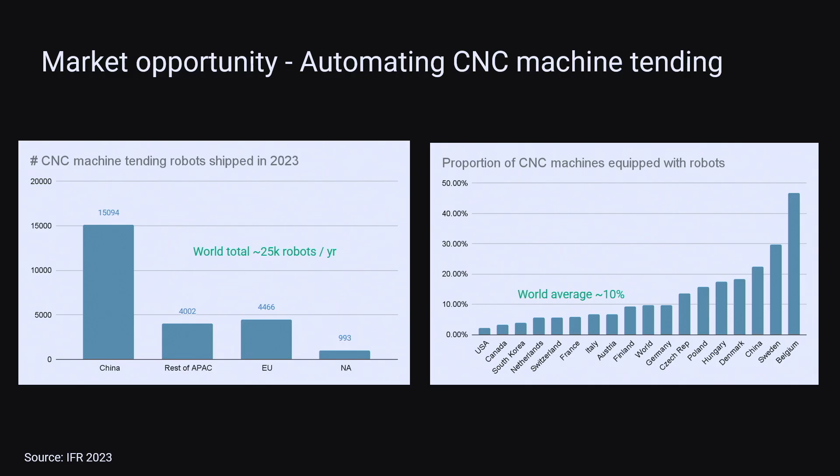On this chart, you can see what percentage of CNC machines today is actually automated. And it's surprisingly low. Also, maybe looking at the US, for instance, it's only about 2%, 3% of all CNC machines shipped in the US are automated. So huge potential. Also in Germany, only 10%.

And if you look around here at the fair, you see so many machine tools already automated, or at least with an approach to automation. And this is something where we still can gain a lot with automating more of these machine tools. And this is something where we would like to help. But first of all, maybe look into the reasons why actually this is not happening today.

So as you all know, robots are really fantastic productivity tools, but when it comes to employing them for automating, we have at least 4 problems. One of the problems is that you have a lack of agility in your production, meaning you want to produce another product tomorrow, you then have again some complicated configuration of that new task that you want to automate, or you want to change the parts that the robot is grasping. That's something that needs to be tackled.

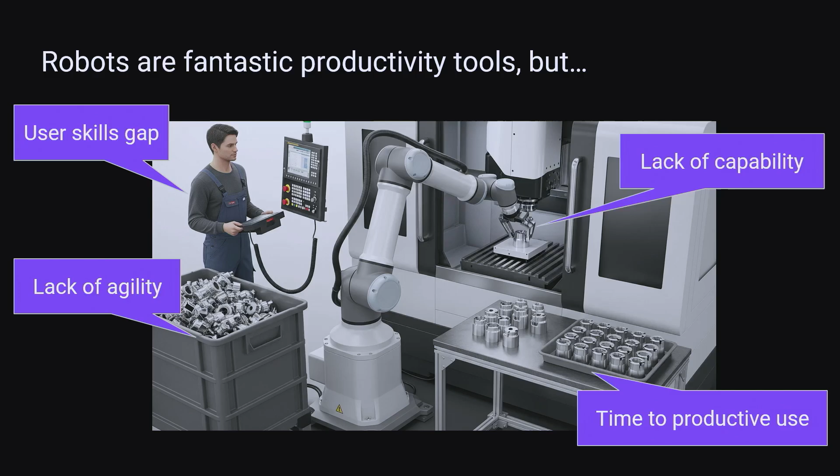The second thing is the user skill gap. So the people that are programming robots today or that are operating robots today, they don't have the required skills to do more complex tasks, so you want to simplify that. The robot itself today is stiff, dumb, and numb, so it cannot feel, it cannot see, it cannot touch things appropriately. So there's a lack of capability in order to make automation more simple.

And then if you want to combine all these technologies, you have a hard time to do that. There's a long time to productive use before you can actually enable these robots to see, to perceive, and to feel. Intrinsic's mission is to democratize access to robotics. What does it mean to democratize access to robotics? It's basically about simplifying the use, the configuration, the programming of robot systems for automation tasks.

And to do that, we are building an AI-integrated platform. And what an AI-integrated platform is of the type that we are building, I will explain to you in a second. First of all, one more word of who we are so that it's really clear. So we are an Alphabet company. We are a sister to Google, a sister to Waymo. And like Waymo, we are another bet of Alphabet.

So Alphabet is betting on us that we can bring AI to the production floor. We can work with some departments of Alphabet very easily, so we can easily tap into the pool of information that we get from DeepMind or from research.

We can also work with the Google Cloud colleagues or the ones that are building Android. And with all of that, I would also claim that we have very good AI, or talented people on AI technology. And this technology we try to bring now with our platform to the shop floor.

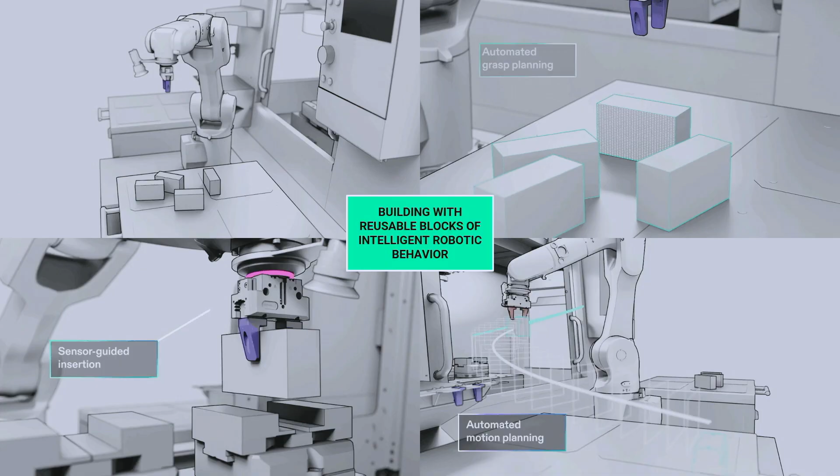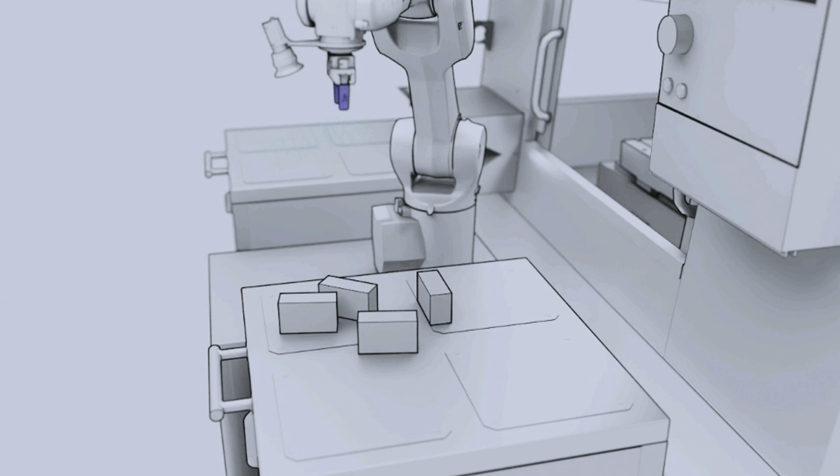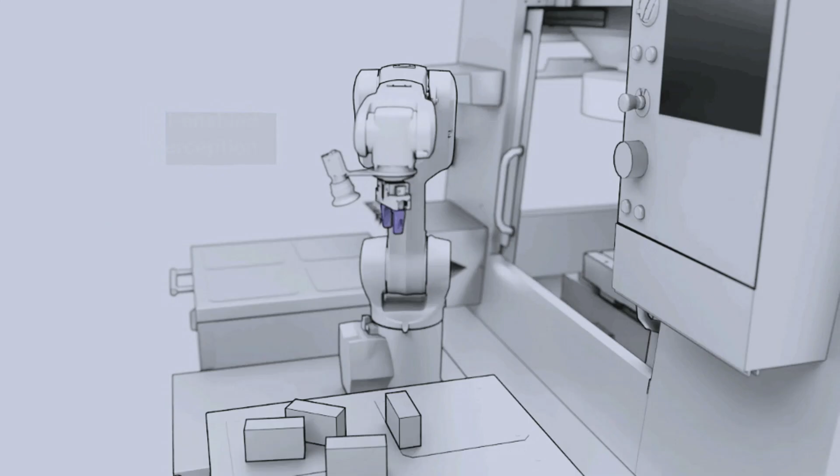So talking about the AI capabilities, these are the four most important or highly in-demand capabilities that we are offering. It's about perceiving objects. The camera can be at the flange of the robot system, or it can be statically installed anywhere in a robot cell. And based on this camera, we can identify raw stock. It doesn't have to be placed in a grid anymore. You can basically place it anywhere on a flat surface. And there will also be the ability to put it in a bin and then grasp it from a bin.

The second capability is automated grasp planning. So it's not enough to just identify the objects. You also have to compute where you can actually pick it, so this also does not have to be programmed anymore. So automatic grasp planning.

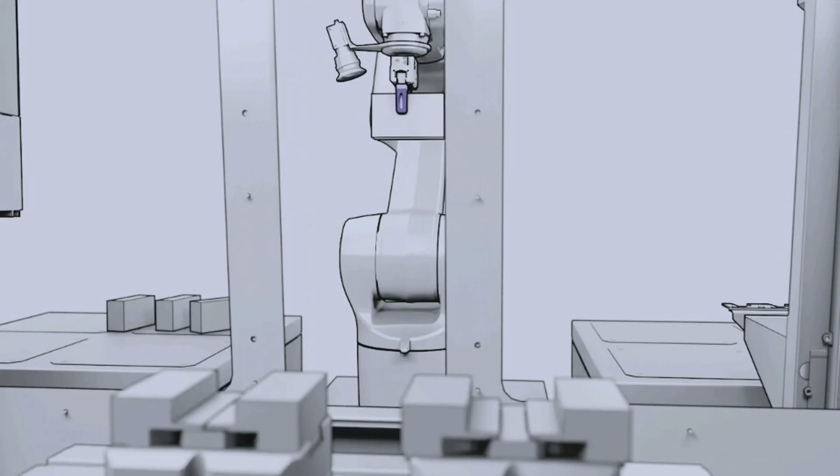And the third capability that's important is sensor-guided skills, for instance, force-guided insertion. If you do not want to specify the exact position, but you know that you have to slide your workpiece into one area of the vise, you can do this with force torque control at the flange of the robot. And once again, this is all robot agnostic. You don't need any special type of robot. You can use any industrial robot, any force torque sensor, any camera. You're not bound to a robot manufacturer's ecosystem.

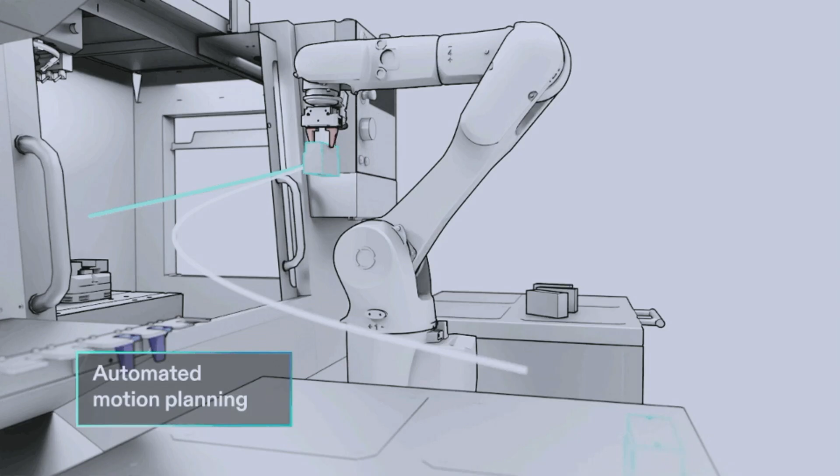And the fourth, the most important part probably, is the automated motion planning. With this motion planning, you are really able to freely configure your system. No one needs to program the robot anymore. It is programmed by itself, autonomously.

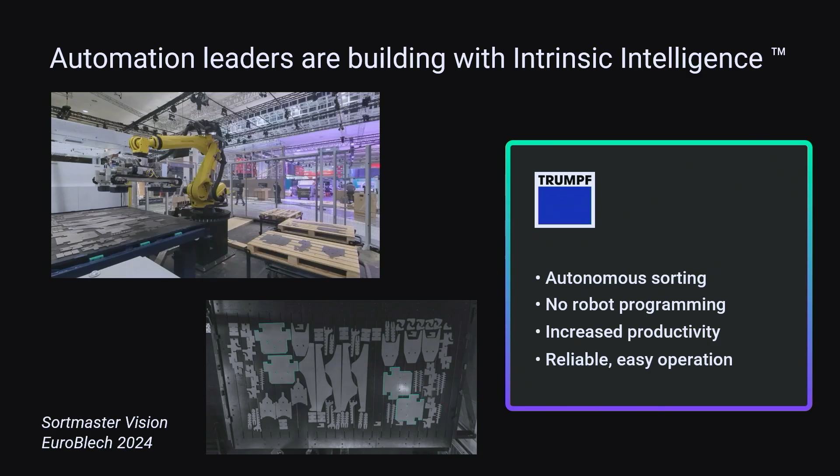These parts are then stored automatically on pallets where you want to have them. There's no way that you can program this by hand or manually today. This is something that is really requiring automated path planning, perception, the way with our foundation models, how we are envisioning it.

And then maybe one other example to really make that point on the foundation models. Today it's possible to have a so-called foundation model for parts that are used in production, and you can just prompt the foundation model with the CAD model of that workpiece that you want to manipulate, and after that you can identify the parts in the image. This works with a simple 2D camera, so you do not need a 3D camera. You can use multiple 2D cameras if you want to have a higher reliability, but as a matter of fact, this is something that is really revolutionizing the perception and the way we can actually program robots eventually.

This works very well with sheet metal, but it also works well with more 3D complex parts. And once again, you do not have to train this anymore. You just need a CAD model of the part you want to manipulate and prompt the foundation model, and it will give you the 6D pose of the object.

Okay, to come to a conclusion, what we see here is that AI today can really unlock value for solution builders, for solution users, so for the end customer. And what in detail this means is that by using a kind of software-based approach, you can much more easily develop a product. You can develop an automation product. It enables productization of your work cells. This creates immediate customer value, and the time to impact, because you only have to reconfigure systems, is much, much shorter.

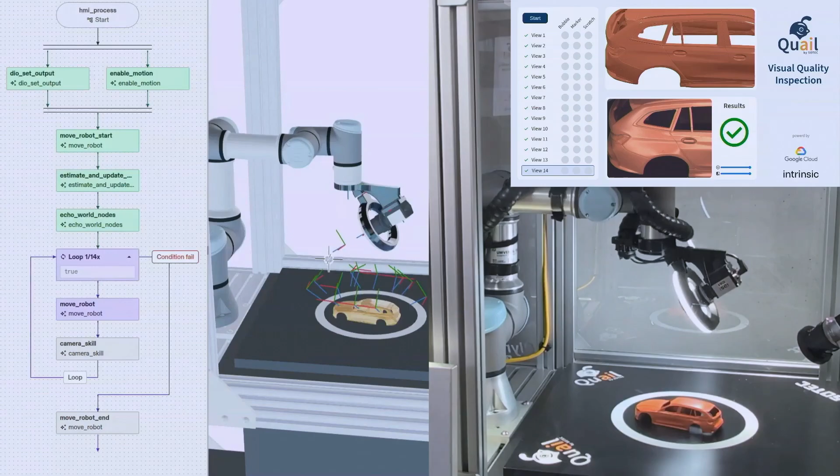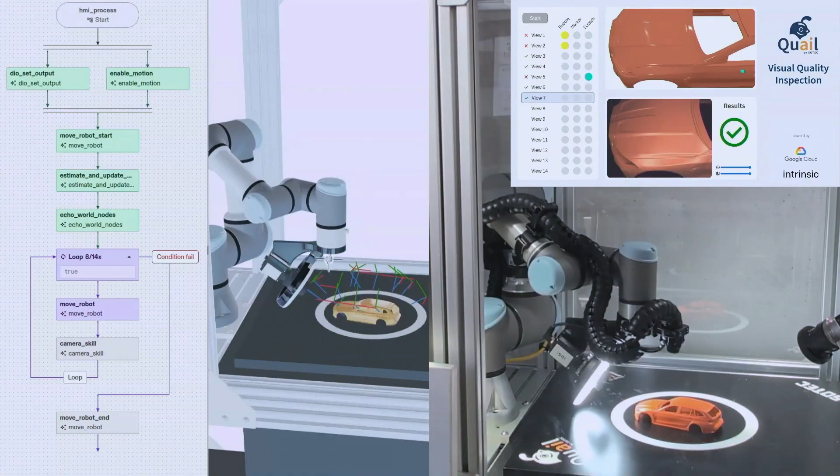Now look at the car body. The car body is moved to a different position. The digital twin is updated immediately once it has been recognized, and relative to this digital twin, the path is again computed automatically. So again, to these 14 positions, and then you see in the user interface what the defects are: bubbles, markers, or scratches.

And actually this HMI at the top also allows you to click on the individual line and then get a picture of the defect. That is not shown in the video. I hope it makes it a little bit clearer what we are building, the solution tooling, and what an end customer can actually do with it.

Perfect. And the collision-free path planning is really essential here. If you do this kind of update in the classical way with a base transformation, how you do it today, you will very likely run into singularities or joint limits. And because we are doing the path planning on the fly, we never run into singularities or any joint angle constraints. And I think this is important to understand for the experts in the audience.

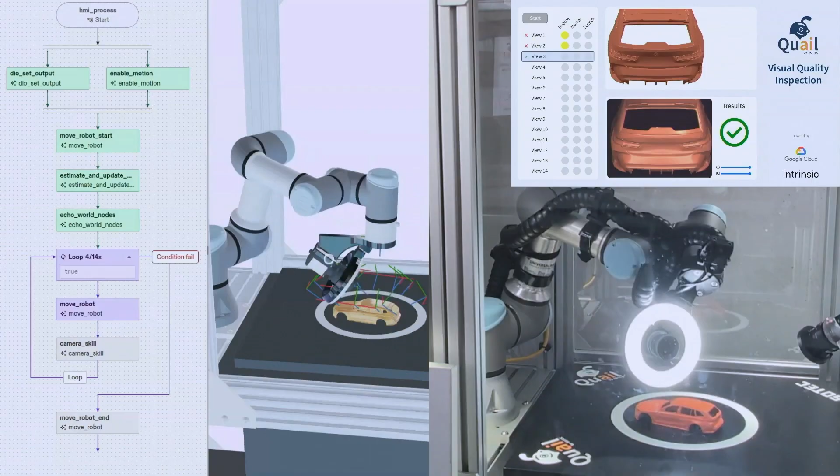Yeah, absolutely. Coming back to the non-expert here on stage. Before we answer the questions of the audience, let's talk. I mean, this is very good to see how it works indeed. What kind of companies are using it already today? That would be super interesting for me. What are the use cases that already exist?

So different use cases. I mean, you saw Trumpf. With Trumpf, we are doing bending and sorting. Then we have smaller CNC automation cell manufacturers, Trinity and Martin Systems. So that's in the CNC area, but there's also inspection, as you saw. For inspection, there's a prominent company, Zeiss, we can publicly mention, and Zeiss has a spin-off called Houston, with which we are operating. And actually, this company, Houston, has a business model.

I think we also want to talk about that. So they come from a project-based business. They are selling projects to car manufacturers, always snowflakes, bespoke installations. And with our software, we are kind of enabling them to go from a project-based business to a product business. So now they can build a work cell that actually can be used for inspection.

And with this product business, they come into a completely different range of their business. Yeah, and they are no longer dependent on what the client wants to do because they're fully flexible in creating their own product. Yep. Crazy, yeah. So I think I've read that a car manufacturer is using it already. Are there ones that you can mention? No. Okay, good to know that, because we just had the VDA here, so it was super interesting to know that. So we have some questions before we come back to our generic question.

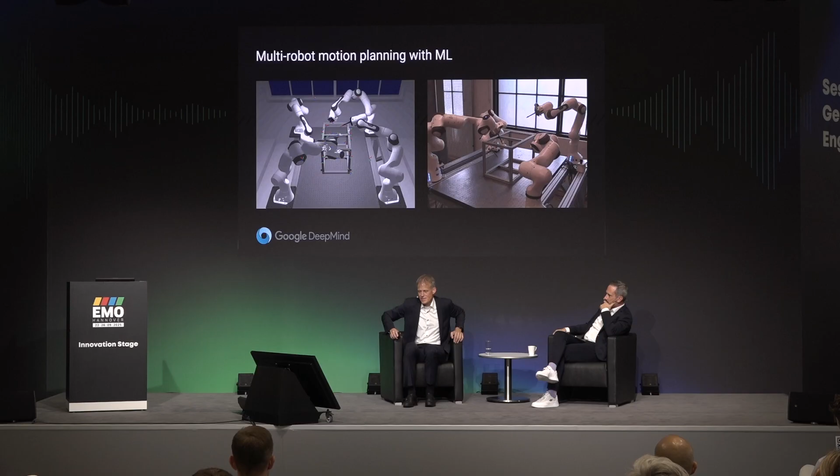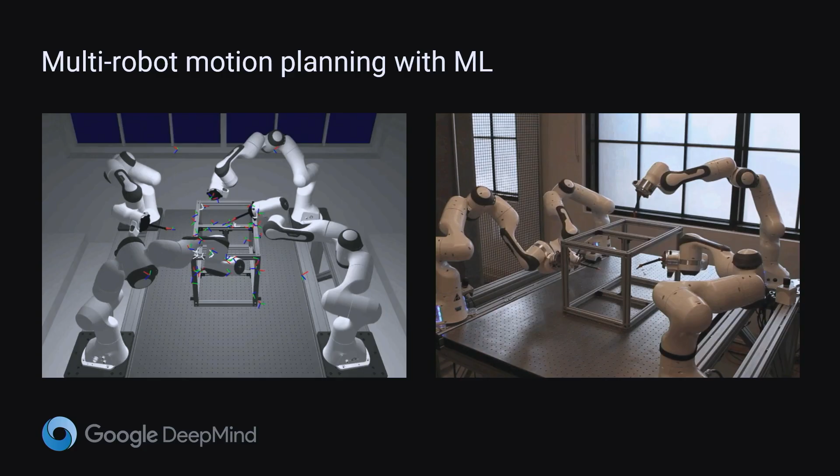Because of Gemini and DeepMind, if I can show one more video, that would be interesting, so that you see what we are doing with DeepMind. Can we switch back to the presentation screen? So this is something where we are working with Google DeepMind on a multi-robot path planning technology. Today it is quite complicated and time-consuming for offline programmers to develop a collision-free path for multiple robots. This is simulating spot welding on a car body.

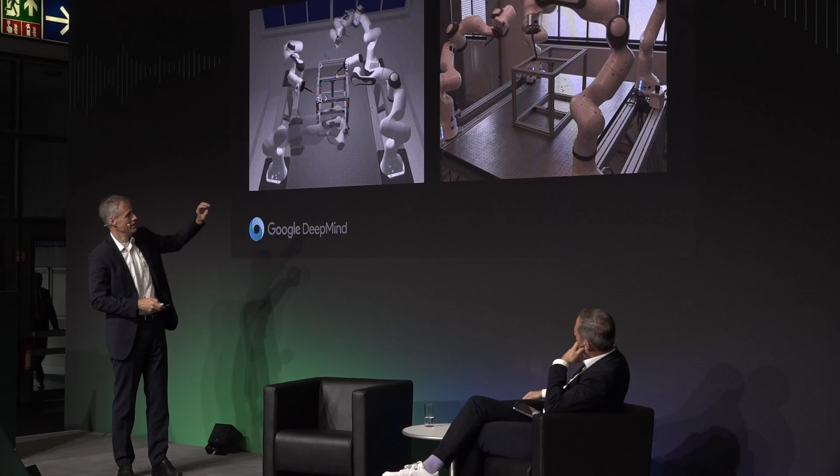So this path here is completely auto-generated. It's based on a technology that we call RoboBallet. It was also just featured in Science Robotics, so it's also part of our R&D work. RoboBallet is very close to AlphaFold, the technology from DeepMind that predicts how proteins are actually folding in space. So that's a very similar technology we're using here.

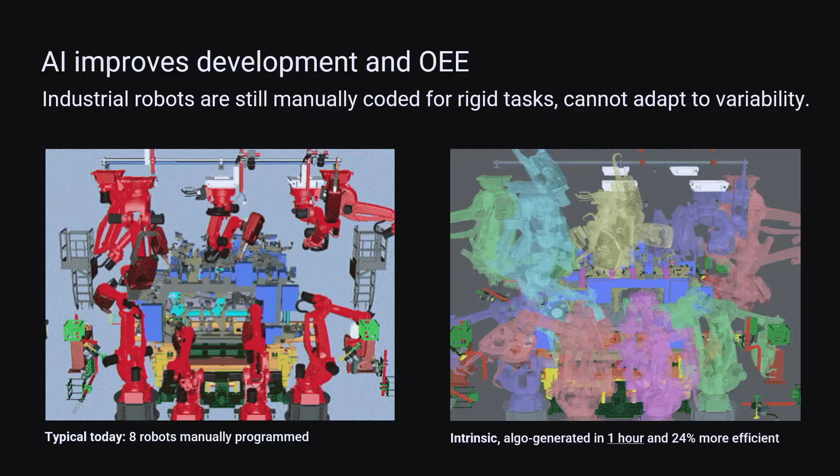This kind of technology can now be used to drastically reduce the engineering time of these multi-robot cells. You see here an example, 8 robots manually programmed. This takes hundreds of hours to do collision-free. With our algorithm, we can do the whole programming in 1 hour and even get 24% more efficient in the execution of the path. So this is a huge win for any car manufacturer we are talking to. They really like this kind of technology. It's still in the R&D domain, but it shows the direction in which AI can bring future production.

Let us quickly talk about this one. This is a fantastic one. So for somebody that is not an expert, we have 8 robots working together. Is it done in a model? So you tell the system, look, those are 8 robots, but do you need to tell them they are located this way, or do you just put in the drawing?

The input for everything that we do is a digital twin. So we need an accurate model of the representation of the world. We need to know where the robots are being placed, but that's also a thing that can be done in the future by AI, where to place the robot optimally. But in this case, it's a digital twin of the cell. And of course, we need a list of points that have to be welded or where some process has to take place. So that list has to be provided, and the rest is the algorithm.

On the other hand, you said automotive... I think your mic is off. Your mic is off? Oh, that's okay. That never happened before. Let me get a new one. Don't forget my question. No. I can switch maybe to the next slide if you're currently out of business. Yes, now I'm losing my speaker here as well.

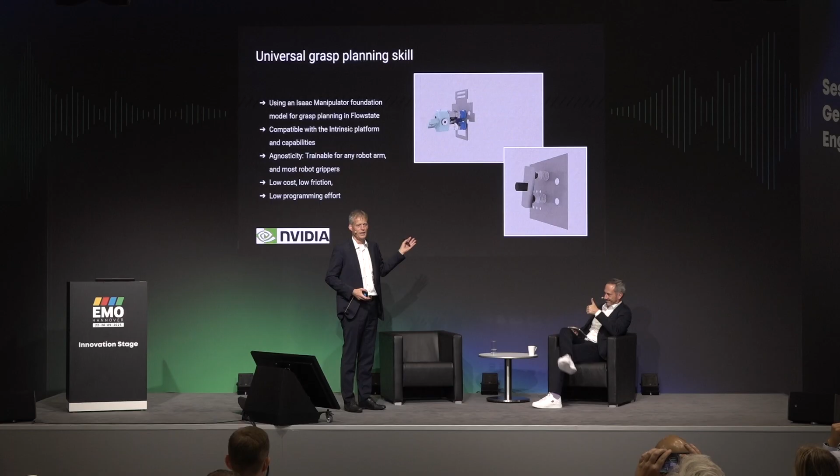So that's something I also mentioned before. We are also AI model agnostic. So you can upload an AI model that is here used for grasp planning, and this happens to be an NVIDIA model for grasp planning. Once you have identified the sheet metal that you want to grasp, you need to identify how you can place the gripper on that sheet metal. You don't want to program this manually anymore. You want to do it automatically.

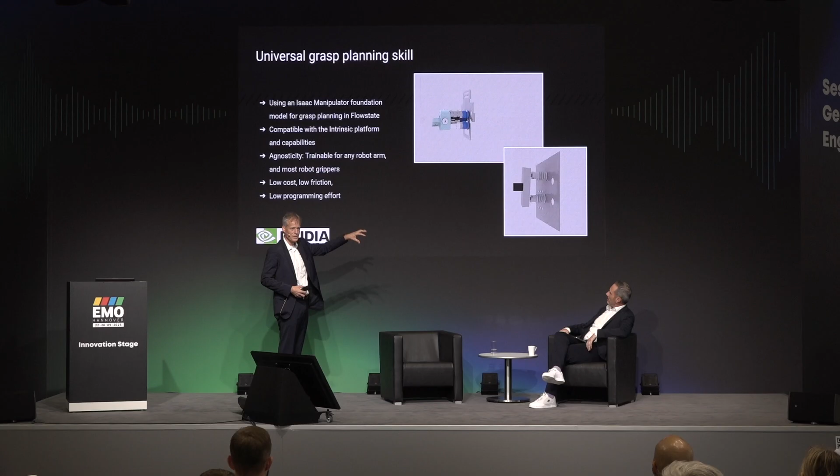So NVIDIA trained a foundation model to automatically compute the ideal grasp position on any kind of sheet metal. So why is that important? You see these holes. Of course, you don't want your suction cups to go to the holes, because otherwise you cannot grasp the object.

So you have to identify for a 3-finger gripper or for a 2-finger gripper where is the best position for this to be grasped. And then you can, of course, also use this in production. So that video is not running. Anyhow, just take this as an example.

Let's get quickly back to the car manufacturer with the 8 robots. And you said they're doing it in 1 hour. Is that really interesting? I know there are hundreds of hours, that's cost saving, but on the other side, it's a serial production and it runs, I don't know, for years, basically, okay? Yes. Of course, the saving is each time, but anyway, it's running for years.

On the other side, what I see really interesting, if you're a small batch producer and you're using robots, then it's like minutes between changing products, right? Exactly. That is what is enabling high mix in the end for these small batch size production. But here it's a significant engineering effort and time.

Today it takes 2 to 3 years to engineer a production line for automobiles. And one significant part is the body in white, where you actually have to weld the parts of the car bodies together. And if you can save on engineering time, that is something that is really appreciated by the automotive OEMs.